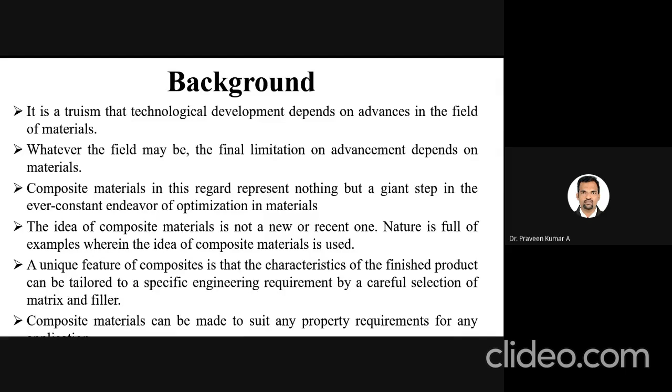Scientists in every country have different materials available. For example, Malaysia has a lot of rubber plantations, so researchers there study how to use rubber in composite materials. If you take South Africa and other African countries, grasses, plants, and hemp fibers are more available—plenty of fibers. So they research how to adopt those fibers into composites. Based on the country and the availability of source materials, these composites are getting developed.

Okay, so what is a composite? How can we define it? There is no general definition for composites till now, but

based on the literature and books, we can say a composite is composed of two or more materials at a microscopic scale, and it can be three, four, or five materials. We call it a composite material. They are heterogeneous at microscopic scale, but homogeneous at macroscopic scale.

So when we look from our eyes, it will look like a single material, but if you look at the same material through a microscope, it will be heterogeneous, meaning we can see how many materials are mixed. But when you see it with your eyes, sometimes it is not visible, sometimes it will be visible. So this is the point they are saying.

So what they are saying is, when you see through a microscope, we can see what materials are present inside the composite. But when you look, for example, at a metal matrix composite, it is impossible to find what materials they have added just by looking, but in a microscope we can see.

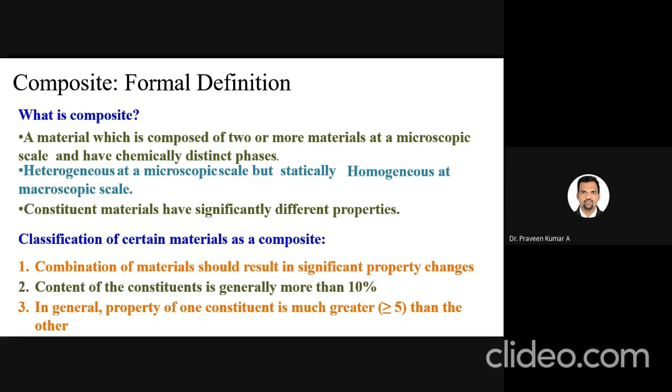But till now there is no proper definition for composite. They say a composite material can be combined with two or more materials that have quite different properties, and the different materials work together to give the composite unique properties. Different material means that material should have different properties, not the same property.

Also, in a composite, if you see it in the microscope, we can easily see the materials which are present there. So what they are saying is they do not dissolve or blend into each other.

For example, if you add sugar or salt in water and mix it, you cannot find the sugar or salt, even in the microscope we cannot see that solution. But in the composite, whatever you mix to make a composite, the two materials will not mix together in the microscope. So we can see them through the microscope, but in an alloy or solution we cannot see them.

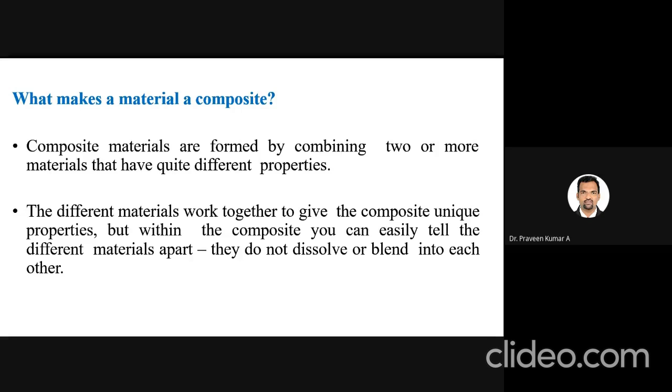Everything about this composite you have to imagine practically. Compare: when you add salt to water and mix it, you cannot find the salt again, even through a microscope, because it gets dissolved. But in the case of a composite, the materials we add never get dissolved, they will be visible through the microscope. That's just comparing it with an alloy.

So why do we need composite materials? There are a lot of materials and metals available already. The simple answer is enhanced, meaning improved, desired properties — what we want. If you want high performance, steel means you cannot even change the property of steel, and if it's aluminum, you cannot change the property of aluminum either. That remains the same. But with composites, we can change it.

For example, with aluminum, if you want to add some property, say wear resistance, what they will do is mix silicon carbide with the aluminum. If you want to use aluminum in high temperature applications, they will mix zirconia with it so that it can resist the temperature. Like this, we can add another material with the metal so that the property can be improved.

So like this we can improve the strength, stiffness, toughness, corrosion resistance, wear resistance, and even reduce the weight. Also fatigue life, thermal insulation, thermal conductivity, acoustic insulation, energy dissipation, attractiveness and cost. These are the main points for why we go for composite materials.

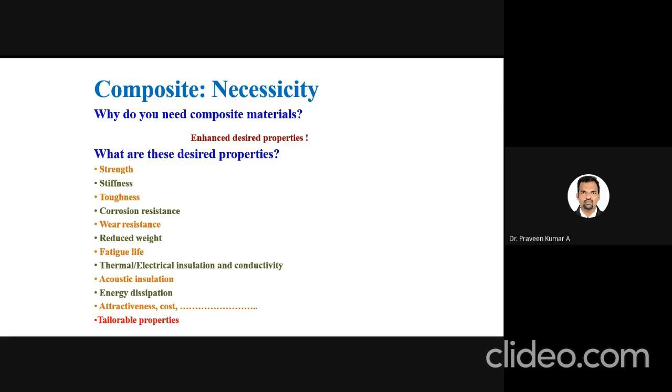Anyone know which material they are using for the wings? Nowadays they are using composites, but earlier they used duralumin. So entire most of the material for this aeroplane is made of duralumin, one type of an alloy. So we cannot use a single material for aeroplane. Earlier they tried with one material, they tried different types of failures they got. After that only they found one material which satisfies all the properties. So this is one simple example for application.

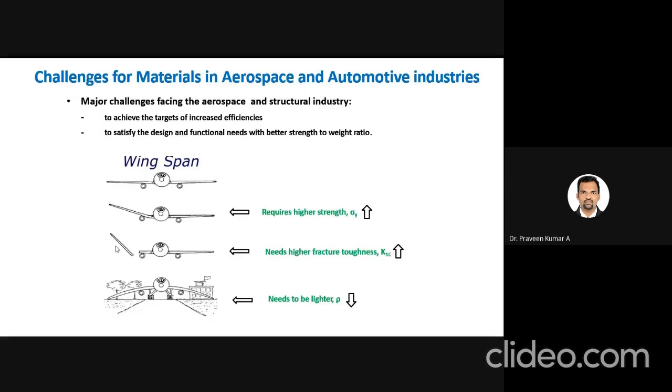Earlier also they used white petrol, today also they are using white petrol, so the fuel doesn't get changed even till now. But based on the material, they one by one reduced it. Earlier they started with 20% reduction, 30 percentage reduction, like that now they are using 80 percentage composite and 20 percentage metal alloys. So the complete weight got reduced and fuel consumption got reduced, so ultimately the cost got reduced.

Our ultimate aim is to reduce the weight of the vehicle. If you reduce the weight of the vehicle, the fuel consumption will be less and you will get more mileage. That's why if you compare today's car with the olden days ambassador, the ambassador will have more weight, it is made of steel material, so it will not give mileage. We cannot go over speed also, it will go at an average speed, and the mileage also it will give less.

But today, if you take any of the cars, completely it is made up of composites, so our mileage also gets increased. The cost of the car also got reduced somewhat, not more, somewhat the cost also reduced. But the only thing is the earlier materials will not absorb the impact energy and transfer it to the passenger, so the car will not get damaged, the passenger will get damaged. But nowadays the car will get damaged, the passenger will escape with minor injuries. Your life will be saved.

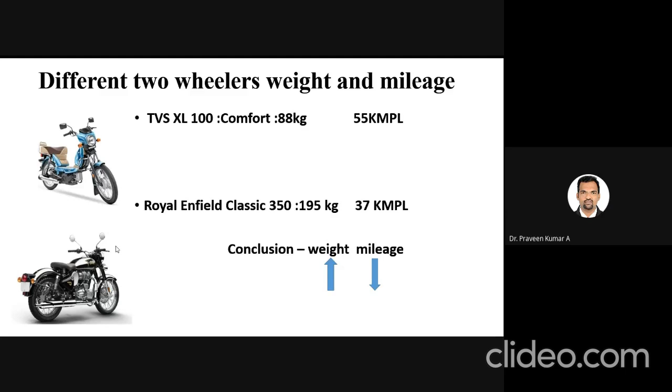So this is the revolution which has happened, used to save the life. What they are saying is they are reducing the weight, at the same time it will reduce the fuel consumption, and automatically when fuel usage gets reduced, environment pollution also gets reduced. That's why most of the European regulations have made a strong point that it should be made up of composite materials instead of metal alloys.

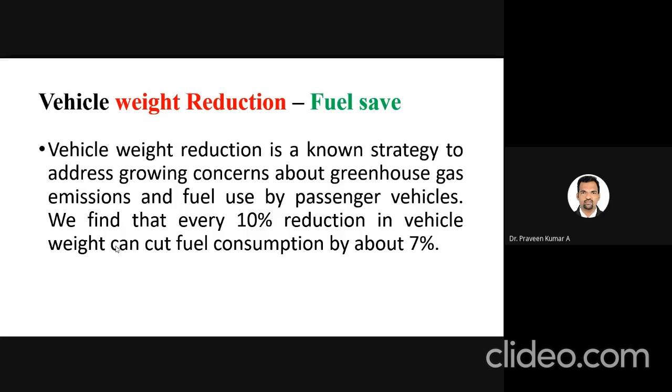So what they're saying is if you reduce weight by 10 percentage, your fuel consumption will reduce about 7 percentage. So when the vehicle weight is reduced, we can save more fuel.

So why do we want to make new material? First condition is to reduce the weight and increase the fuel economy, meaning reduce the fuel amount. Automatically it will reduce the pollution. But at the same time, whatever mechanical properties the metal alloys give, our composite also gives. So without compromising the mechanical properties, only weight should be reduced, but the property we should get the same. So like that we have to design a new material.

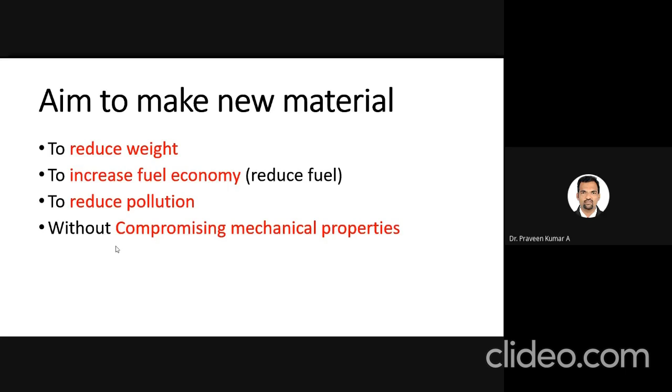Imagine now they have reduced about 200 kgs to 300 kgs. So then how much fuel can they save nowadays? That's why composite materials play a major role in any application. First it will reduce the weight, next it will give improved properties, and so many other things. They have given us a statistical report which shows these improved properties.

Earlier they used composite material that was not fire resistant, so 15,000 people lost their lives because the material used was not fire resistant. Nowadays everything has improved, so whatever material they use now is fire resistant. Earlier they used metal matrix composites, now they are using polymer matrix composites to increase the fire resistance property.

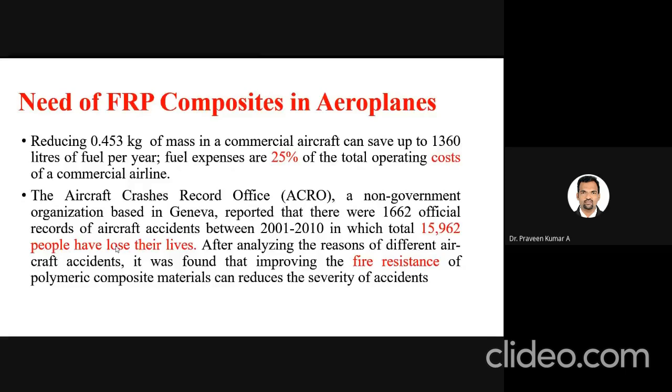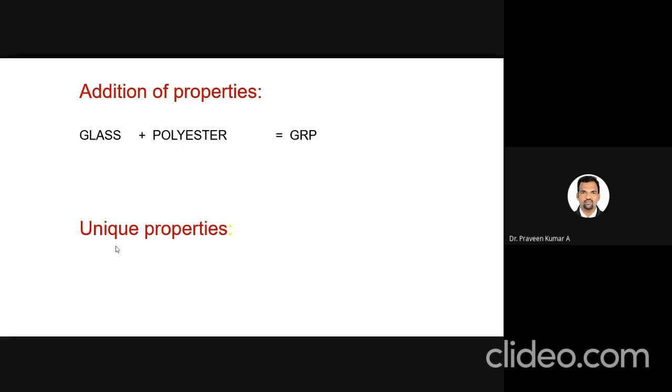So what do we get if we make a composite? First, addition of properties. If glass is A and polyester is B, adding glass and polyester gives you material C, which is glass fiber reinforced polymer. Glass has high strength, polyester has chemical resistance, so together you get a high strength, chemical resistant material. Earlier, glass alone had strength but no chemical resistance. Polyester alone had chemical resistance but not high strength.

So when you mix the two, you get GRP. The best example of a composite is concrete. When you use only sand, nothing. When you use only gravel, nothing. When you use only cement, nothing. When you use only steel bars, nothing. But when you mix all of these, you get a strong pillar.

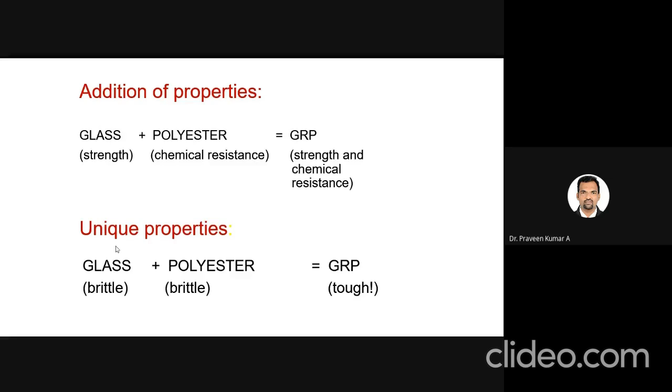So each material has different properties. When you add them together, you get the combined property — that's what we call a composite. We cannot call glass alone a composite, we cannot call polyester alone a composite, but together when mixed we call it GRP, a composite material. Also, unique properties emerge: glass is a brittle material and polyester is a brittle material, so when combined you get a tough material. The mechanical properties also change.

Now look at this temperature chart. On the y-axis they have given temperature: 200, 400, 600, 800 up to 2000 degrees Celsius, comparing different composites. Earlier they used polymer composites, which could withstand around 400 degrees Celsius. Then they tried metal matrix composites, which withstood around 1100 degrees Celsius. Then ceramic matrix composites, which withstood around 1400 degrees Celsius. Then carbon or graphite composites, which withstood about 2000 degrees Celsius. So the evolution has happened year by year, as people compared different materials with all the older materials.

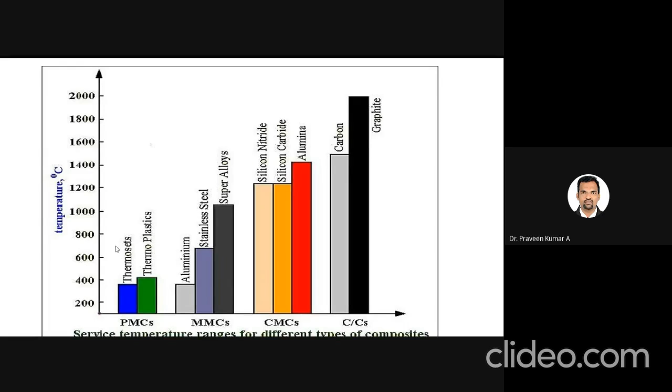At last, carbon fiber composite is the material used for space applications. Where you have high temperatures, if you want to withstand 2000 degrees Celsius, you can use carbon composites. For example, in power plants where a person wants to resist fire, they will use cloth made up of carbon fiber so that fire will not affect them. So wherever you want to withstand temperature, you will use this composite material.

What are the special features of this composite material? The first one is good specific strength. When you compare strength in terms of weight, we call it specific strength, or strength to weight ratio. These composite materials have 40 to 60 percent more strength to weight ratio than aluminium. Among all metals, aluminium has the highest specific strength, but composites have 40 to 60 percent more than aluminium, and also corrosion resistance.

Corrosion resistance means, for example, you are using a vessel prone to acids. What will happen after 5 to 6 times of usage? It will get rust, corrosion will happen. These composite materials will never get corroded, no matter how many times you use them or whatever chemical you use. But if you use metal or alloy, corrosion will definitely be there. In composite, you never get corrosion.

The specific strength is more, and durability. When metal and alloy get corroded, their life easily erodes. But in composite, there is no erosion, so durability is more, and the life of the material will be longer. That's why they are replacing metals with composites.

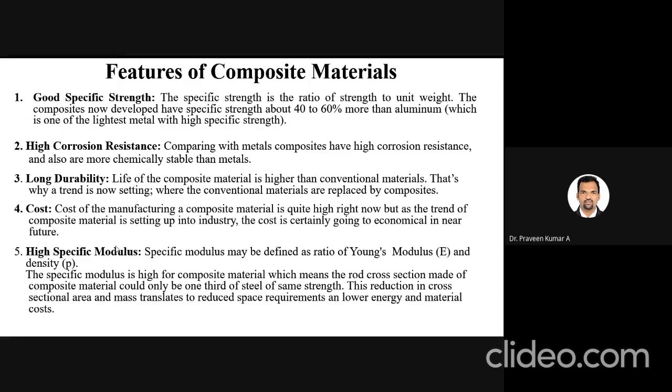The other point is high specific modulus, which means the ratio of Young's modulus to density. This is also very high for composite material, meaning we can use less cross-section area and mass compared to metals. This is the fifth property of composite material. These are some of the properties compared with their use.

Earlier they used steel more in every place, because the cost is very low. Next they used aluminium, so steel and aluminium are the most common metals in any product. But nowadays all these parts are made completely of composites. Take the example of a washing machine: earlier the complete component was made with lightweight metal alloys, but nowadays if you touch it, it's composite material. Even from the sound itself we can tell. Similarly, earlier they used steel chairs in all homes, but nowadays they are using polymer composite chairs.

The main reason is weight. When you compare steel and aluminium with composite, composite has much less weight than aluminium. And thermal expansion: when you heat a material, it should not expand, because if it expands, the strength will get reduced. For example, if you heat steel or aluminium, any metal, it will get bent due to expansion from heat. But composite will never get thermal expansion, not even 1%. So thermal expansion is very low for composite.

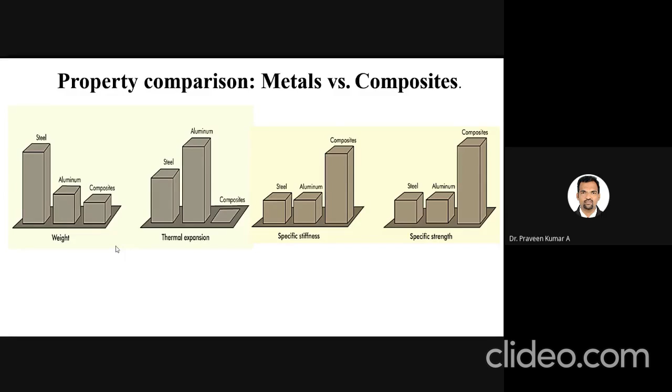But composite will not get that much deformation. And strength also, it is more when you compare with the metals. Okay, so the composite will have more strength. These are the four main properties in which the designers and engineers have chosen composites and replaced all the metals and alloys.

Okay, so in that, as I have said, simply only one term I am using, nano composites. Composites is a material which they have used for more than 100 years, but nowadays, recent 2020, from 2010 to 2020, everyone is working on nano composites. So this is simply one example I am giving, means the effect of nano composites, how to use the material effectively.

A simple practical example you can keep in mind to remember this nano composite is buttermilk. If you take a tumbler of buttermilk, 100 ml, imagine you are putting one whole green chili in that, mixing it directly. If you drink it, 95% of the time you never get the taste of the chili. You will get the taste of the buttermilk, but you won't get the taste of the chili.

And imagine that is macro level. Micro level means you are cutting the same chili into 10 pieces, mixing with the buttermilk, and you drink. Now 60% we can able to bear the chili smell. Same chili you grind in the mixie into powder, and add in the buttermilk. Now if you drink, 100% of the chili property you will get.

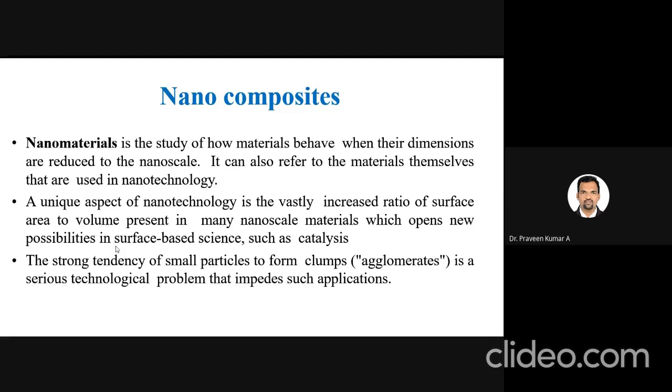Even when water falls on the raincoat, it will not stick on it. It will easily drop from that. So like that, nano material they are applying in all the areas now. So when you add any nanomaterial in the composite, that is called nano composite.

And another thing which they are using recently is biocomposite. Biocomposite means we are using any biomaterial. Biomaterial means which will withstand blood, which will withstand the human bone - everything which is kept inside the body, then we can call it a biomaterial. These biomaterials can be added to any composites, then we can call it biocomposites.

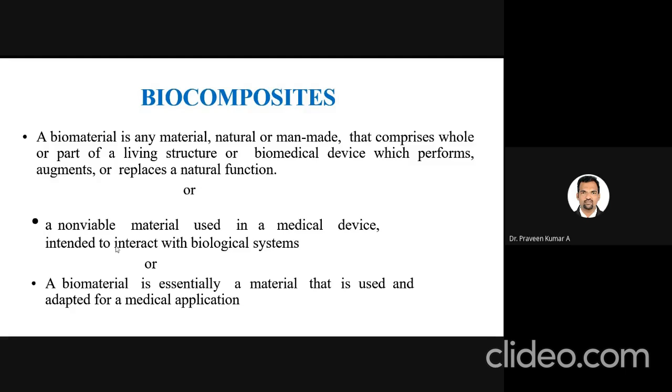So where are they using biocomposites? For joint replacements - when two joints in a human body get damaged, to join that they are using biomaterials, bone plates. Earlier we can see in movies also, because when bone got fractured, they might have kept steel plates inside. After that, they kept titanium plates. Titanium is a metal, so after 5 years, when your bone gets joined, it will get itching.

So it cannot withstand our blood circulation, and it will give more pain to you. So what will they do? Immediately they will make a surgery, and they will remove the joint. Nowadays it is not at all required to do a second surgery, so we can use biocomposites in that.

What will it do after five years? Its lifetime will be 5 years. So when the bone got joined, after 5 years it will get degradable, so inside the blood circulation, it will not get into it.

Earlier, they will make stitches, and after they will say after 10 days come, we have to remove the stitches. But nowadays they are using biomaterial for the thread. So that thread, after 10 days, it will get decomposed, so no need to do another time removal. So like this, dental implants.

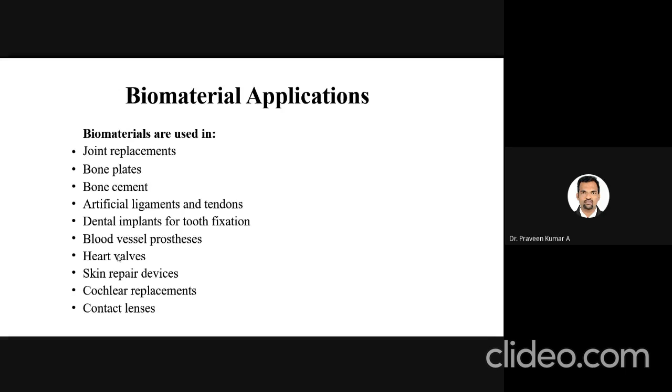So 3D printing is a development in manufacturing, but we have to look for different materials. That's why we are going for biomaterials. So this is also one of the advanced composite, biocomposite materials.

So like this, the ages, the evolution of materials, as humans developed, this material also got developed. Starting from gold, copper, bronze, iron, then cast iron, steels, then alloy steels, then super alloys, then titanium alloys. So they kept on developing.

So like that, composites also developed from 10,000 BC. Natural fiber composites, then man-made composites, then hybrid composites, then nano composites. As the years passed, these composites also got developed. So from 10,000 BC, the composite started its growth till 2020, and it is still growing.

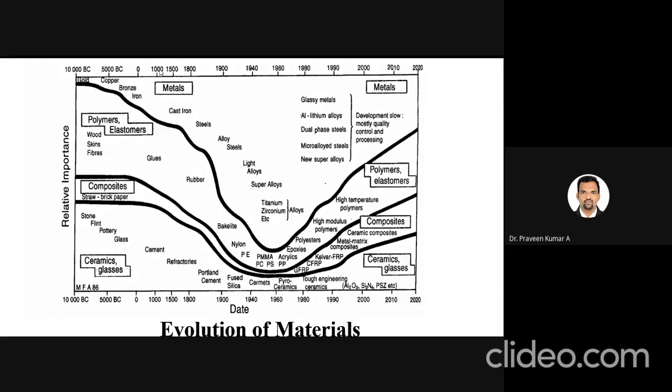So I'm not going to discuss this deeply. Next, as we said, the composites which have evolved - what did they do? Earlier days, to create a weapon, first in 4000 BC they used writing material.

So in movies we might have noticed, they will insert that one bird feather in one liquid, then they will write. That liquid is made up of papyrus plant. So in 4000 BC itself they have used papyrus plant mixing with these two things as their writing material.

Then later, 1300 BC they used straw bricks. Straw bricks means they used grass with the clay, combined both and they used.

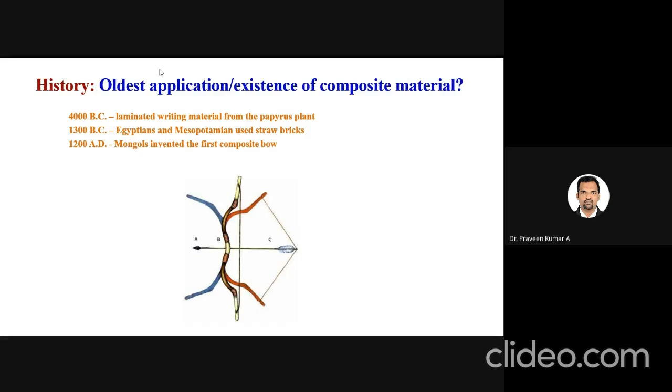Then later, 1200 AD the Mongols used the composite bow. So we will see how they are making this composite bow, and what materials they used. They have used wood, horns, leathers, bamboo, and deer horn.

This horn and antler they are using because they are naturally flexible and resilient, so the bow should be flexible. So they use this horn and antler, and they use the sinews.

This part they made using sinews, that is made up of cows and deer tendons and glue. And bladder of fish - they will cut the fish and take the bladder for sticking. To stick the two wood, today we are using Fevicol, but earlier they used bladder of fish as a glue, and strings in the bow strings will be there.

So they used horse hair, otherwise they used silk. So these are the materials they use.

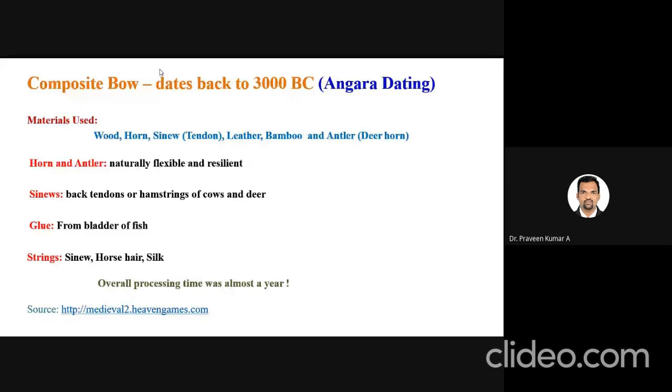So to make a bow it will take 1 year, to make a complete bow, so that much time it will take to set, because everything should be strong. If it is wet, it will break again. So to make a strong bow it took 1 year for them, when it was 3000 BC.

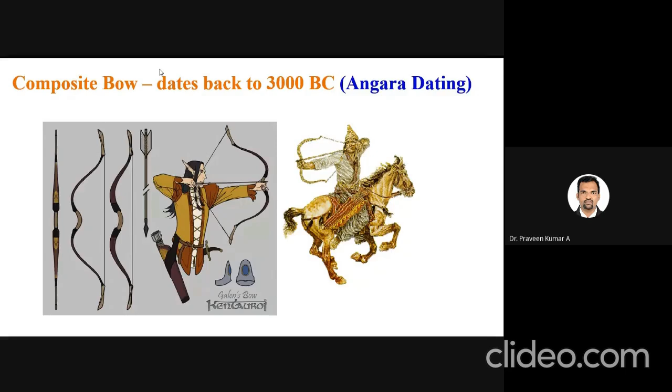This bow, different kinds of bow they developed using natural materials. They combined 2 to 3 materials. They developed composites in 3000 BC.

Some examples are straw bricks, concrete, and wood. If you say our tree is there, if you cut the tree, there will be cellulose and lignin. So this is the best example for a natural composite.

Our human body also - muscle and bones are made of different materials. Muscle is one type of material and bones are of different types of materials. So this is also one type of composite.

Then tires - if you see a tire, if you burn the tire, you can see steel fibers inside the rubber tire. So tire is also one example of composite.

Then plywood - from 2 to 3 wood materials only they are making plywoods. Then sports materials also they are using.

If you take a cricket bat, that bat will be of one material and the handle will be of a different material. Both use some gluing agent to make the bat. If you take a shuttle bat, the net is made up of different material, and the outer covering is made up of different material. Most sports goods are made up of different materials. If you take a football, outside one material cloth will be there, but inside rubber will be there - a rubber ball, and there you are blowing air. So like that, composite is employed everywhere in all products.

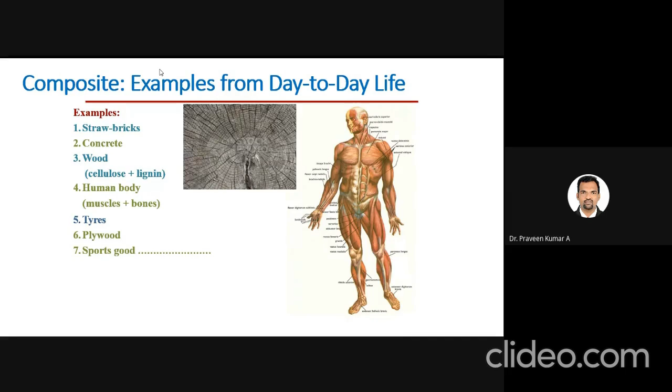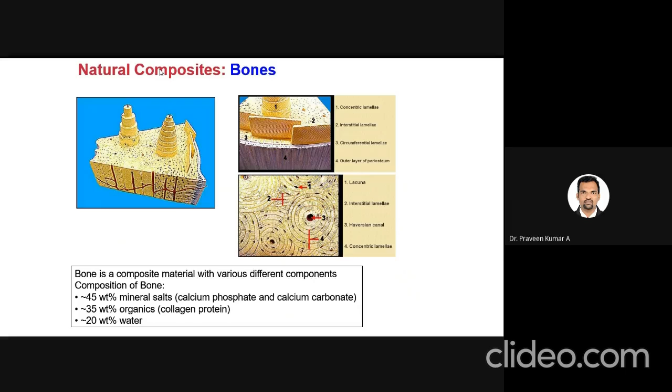This is the best natural example for composites - wood and bone. These both will have mineral salts, collagen, water, like that. Different types of materials are added in bone and wood. This is a wood - wood is also a best example for composite, which will have cellulose and lignin.

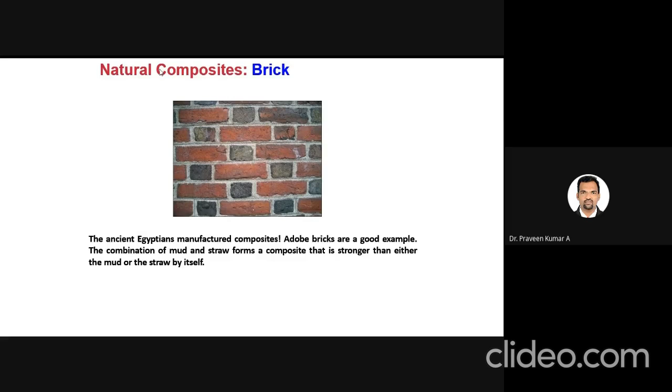And brick - see the brick's color itself, one is red, one is black, and in between they use the cement. So these bricks also use two to three different components. If you go and visit manufacturing sites, you can see they never use only clay - they add some other components to get some strength, and then only they will burn it. Then only we can get the brick. So this is also one best example for composites.

And you might have seen sea shells. Sea shells are also a good example for natural composites, in which calcium carbonate will be more. From these shells we can make teeth, so for dental applications we can use it, since it is much stronger.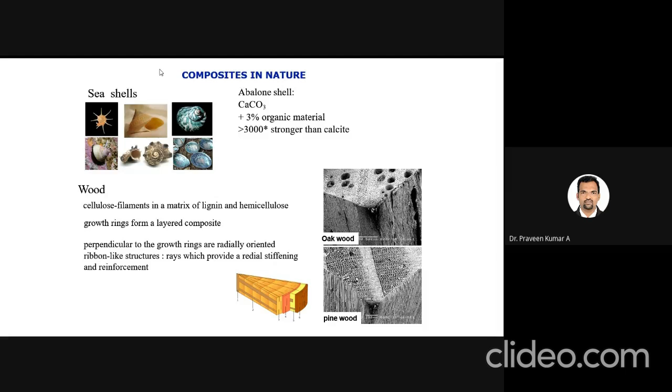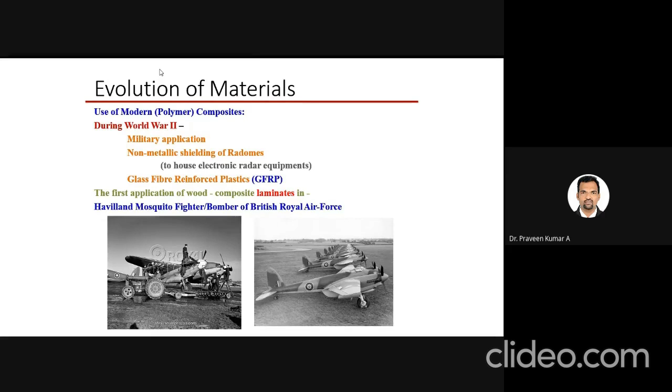These shells are all available naturally as a composite material, which is not made by man. Everything available naturally will have a combination of 2 or 3 materials. Later, man-made composites were developed during World War II. For military and radar applications, they used means to reduce the weight, using man-made polymer composites during World War II.

So now we can see, if you combine matrix and reinforcement, you will get a composite. This is just a schematic diagram. The matrix will be continuous - if you imagine, it will be like a gum or glue. That gum is the matrix.

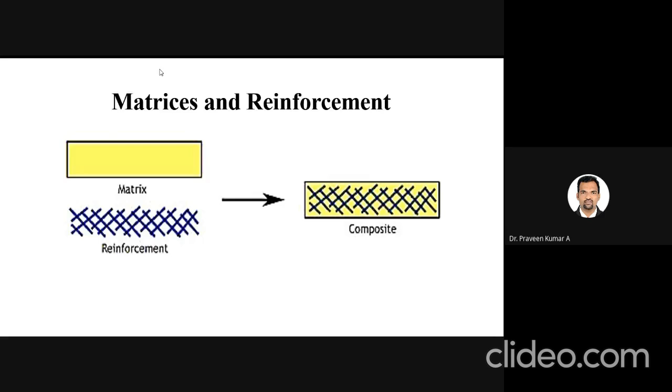The reinforcement will be like our jute fibers. We can use mats, house-made mats, like we use in the house. So when you combine both, you will get a composite plate. This is a composite.

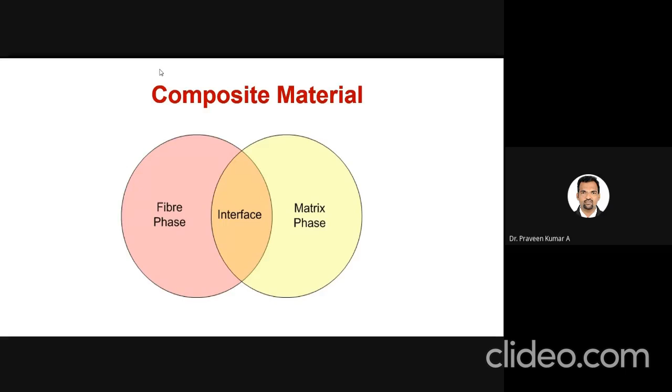When you combine this matrix and the fiber, at that interface, does it get mixed? No, it will not mix together like that - it will form a bonding, a new bonding. That bonding only makes the material very strong.

The constituents of composite are matrix and reinforcement. Here we can see the light color - that is matrix, and the center dark color is fiber. In between, the hatched parts are the interface which is formed. So clearly they have shown this.

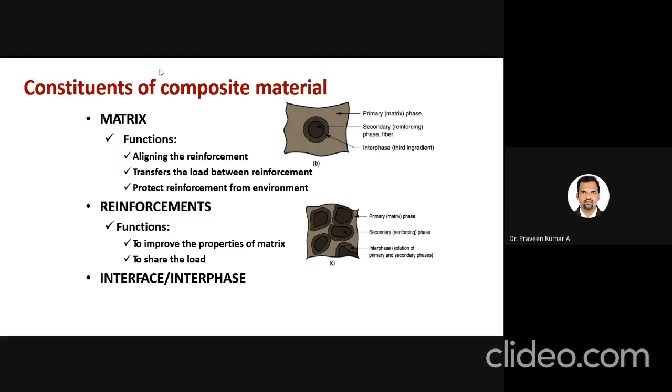So like this only the composite will develop. Even if you mix 2 or 3 materials, it will not completely dissolve in that matrix. This is a microscopic view - if you see under a microscope, this composite will look like this only. We can able to see a matrix, we can able to see a reinforcement, and also we can able to see an interface, that is the boundary. So three things we can able to see.

Example for composite: the mixing of lignin and cellulose is wood, so that is one composite. Gravel and cement is concrete, so that is composite. But we cannot say the same for hypoeutectoid steel - when you mix ferrite and pearlite, it will never be a composite. Why? Because it gets mixing, it gets dissolved, so we cannot able to see separate phases. So we cannot call this steel a composite.

Reinforced concrete - gravel plus cement and steel - is also composite. Then stainless steel - if you mix any material, the grains will get moved, so that also we cannot call a composite. Cement alone is not a composite - only when it mixes with some material and makes concrete, then we can call it composite.

Cellophane we can call a composite, because multiple polymeric layers, different polymeric layers will be there. Reinforced plastic, even though that plastic will have different material, it will not improve the property, so we cannot call it a composite.

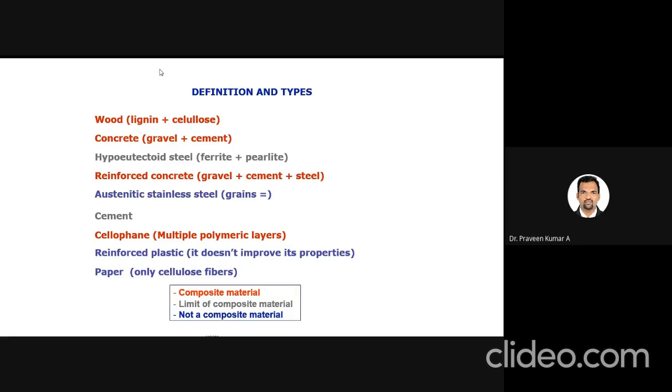In earlier days you have studied paper also - they mix more materials and make paper. Can we call it a composite? No. Why? Because only cellulose is used in the composite paper, so we cannot call it a composite. Simple examples of which is composite, which is not a composite - you can understand from this.

So based on composite, development was there. When it is a composite material, if it is applied to any part, it is called a composite structure. Composite structures are there - only composite they have used, and they used foam, that is called a sandwich.

Everyone knows about sandwich - if you take a food sandwich, top and bottom layers will be bread, and inside they will keep some stuffing and vegetables. Like this only, this composite sandwich structure we can make - outer top and bottom we use the same material, and inside we use a different material. That is sandwich structure. Then honeycomb structure - top and bottom we use plates, and inside structure will be honeycomb. That gives more reduction of weight and increased strength. So based on the different structure, we can change the composite applications also.

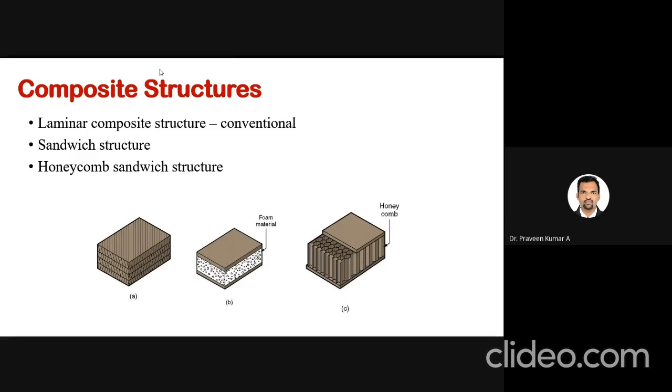So this is the main thing. There are only five materials in our universe: metal, polymer, natural materials, foams, and ceramics. If you combine any two of these, we can call it a composite. If you combine metal and polymer, that is a composite. When you combine ceramic and metal, that is also a composite. When you combine foams and glasses, or any two of these five types, it is called a composite.

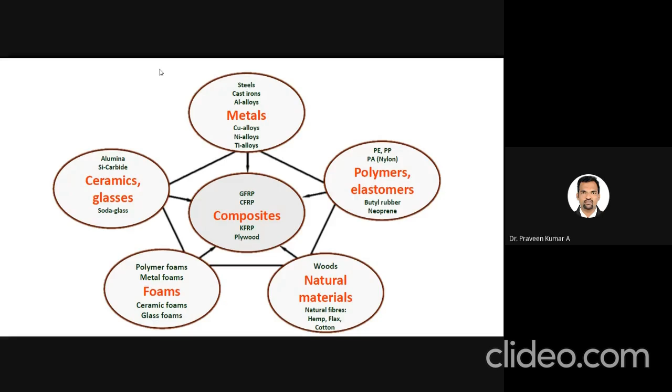So how to make a composite is the biggest challenge, because when you mix two materials, first they should get mixed properly. For example, when you mix salt with water, it dissolves. When you mix sugar with water, it dissolves. But if you mix wax with water, it never gets mixed. Composites are the same way - they never just mix naturally. So we have to see which materials bond well together.

For example, if you want to make one complicated shape, which manufacturing process can we use? 3D printing has been used for the last 20 years, but earlier we could not use composites with it. Nowadays we can use composites in 3D printing. So which manufacturing process and which material to use - we cannot combine them randomly.

For example, take biryani - there are varieties of biryani, 50 varieties. How do they make different biryanis? By changing the ingredients. If it's more spicy, it's called Hyderabadi biryani. When it's more sweet, it's called Kerala biryani. When it's average, it's called Tamil Nadu biryani. Composites are the same way.

When you mix different materials, you get different properties. Andhra people will not eat Kerala biryani because it will be sweet - they never like sweet. So whichever property you need, you add that material, and then only you get that property. So we can produce n number of combinations using these materials based on our requirements - that is the beauty of composites.

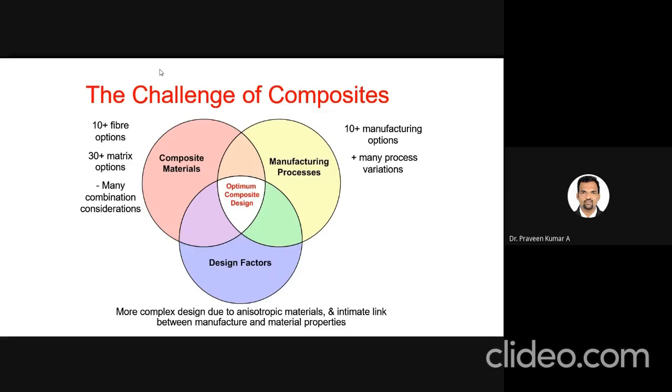Okay, so what they are doing? As we said, composite means combination of fiber and matrix. So this fiber will have high strength, high stiffness, and also less weight. Here the matrix will have good shear properties and low density.

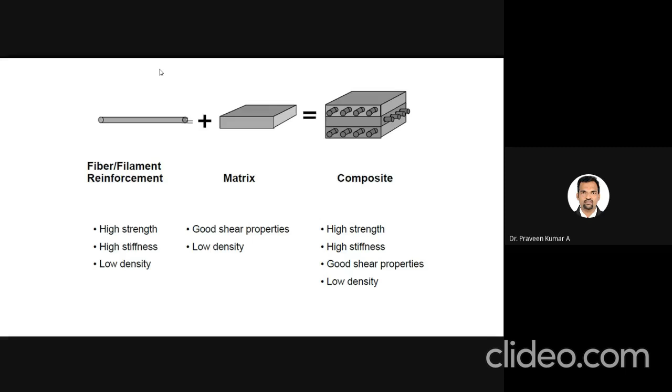So easily we can know the formula. The formula for composite is C equals A plus B. But not every time - it won't always be the same. Sometimes you'll get A plus B equals C, and also D - one new property will be formed when you mix these two materials. That's also possible, so we can get more properties in the composite, but a unique material alone will get only very few properties.

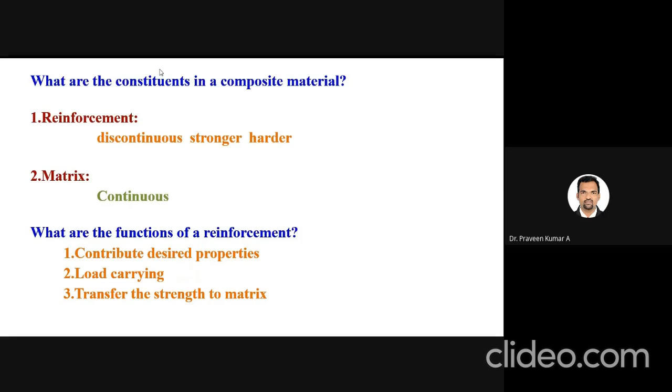So the reinforcement will be discontinuous, but the matrix will be continuous. When you mix both, you get a continuous material. So what does the reinforcement do? It contributes - the reinforcement will improve the property, and it will carry the load and transfer it to the matrix. This is the work of the reinforcement material - it improves the property, carries the load, and transfers the strength to the matrix.

And what does the matrix do - the matrix will combine the fibers, whatever fiber we are using. For example, take house mats - if you pour water on that mat, it will get wet, meaning it will absorb water. Now imagine if you fill that mat with matrix, like epoxy matrix, which is resistant to water.

The water will not be absorbed, so it will protect the fiber from the environment. Abrasion and scratches will not happen to the fiber, and it will completely and equally distribute the load within the fibers.

Yes, okay, and also it will distribute the load evenly. When you use a composite, the load should be evenly distributed - sometimes in some areas it will be more, some areas less, but it should not be like that. It should be uniformly distributed, and it should have impact resistance and better product finish. So these are the functions of a matrix.

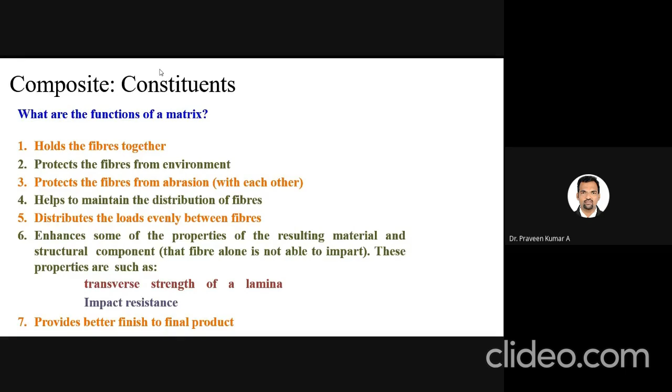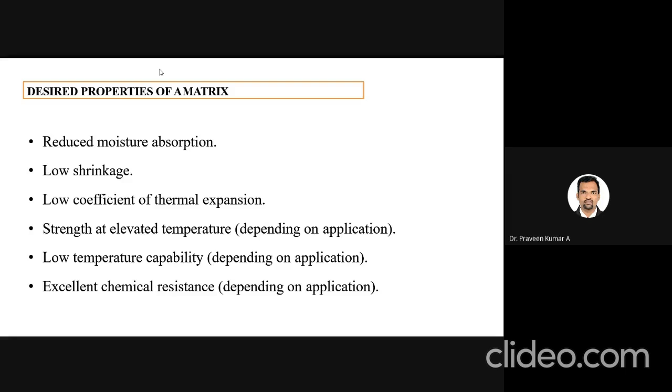And what properties should a matrix have? First, it should not absorb moisture - whether it's steam, water, or chemicals, it should not absorb it. Also low shrinkage and low coefficient of thermal expansion, so when exposed to high temperature it should remain stable, and it should have high strength, low temperature capability, and excellent chemical resistance. These are the main properties a matrix should have.

And what does this fiber do? The fiber is the reinforcement which improves the property. In a composite of matrix and fiber, typically 70 to 90% of the load will be carried by this fiber only, so while choosing the reinforcement we have to be very careful. It also provides stiffness and strength - the fiber does all of this. The matrix is simply to transfer the load and protect the fiber from the environment.

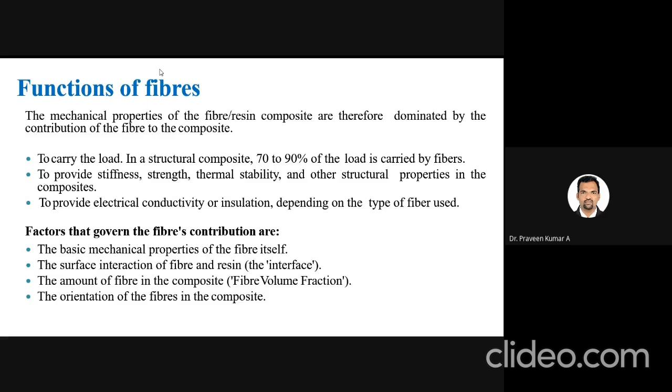And what properties should it have? It should have basic mechanical properties and interface properties, and we should consider fiber volume fraction - meaning in the composite, how much fiber should be used and how much matrix should be used, so that fraction should be considered. Also direction or orientation - horizontal, vertical, or 45-degree - plays a major role.

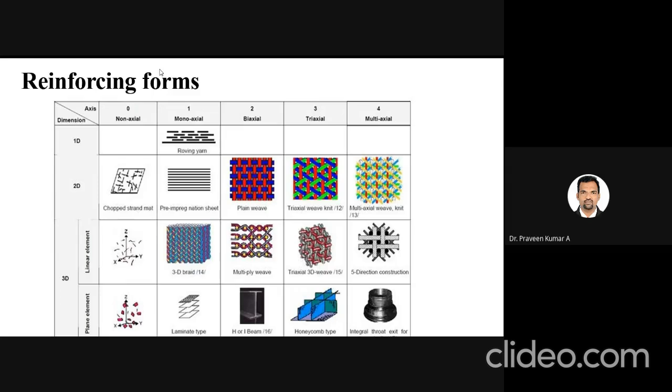These are the different types of fibers - one dimensional, two-dimensional, and nowadays they are using three-dimensional also. If you take a cloth, that is the best example of a fiber. Even with different types of weaving, if you weave in a different way, the strength will be different. So these different types of fibers exist. This is a unidirectional fiber, meaning fiber in one direction only.

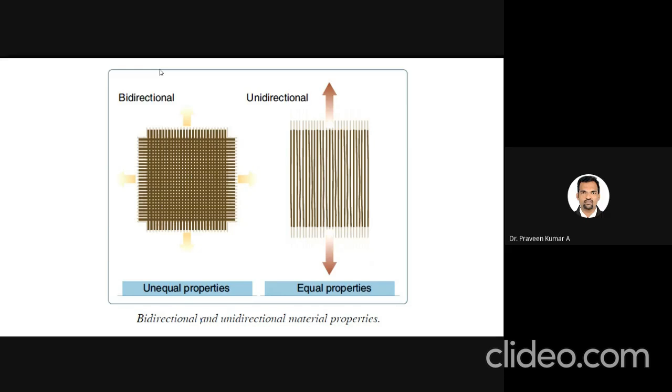In horizontal direction, thread will be there, but bidirectional fiber means two directions fiber will be there. In unidirectional fiber, only in the tensile direction the properties will be more, but in bidirectional, both sides the property will be more. For example, when pulling unidirectional fiber in the horizontal direction, strength will be very less, but in bidirectional, even if you pull vertically or horizontally, the strength will be more.

How do we classify these composite materials? This detailed classification will be explained by Mr. Nagarjuna in tomorrow's session, but just one slide now on how these composites are classified. Based on how we are making it: for example, if you take a seashell, in nature itself it is made of composites, so that is a natural composite. Example, wood - we are not doing anything, in nature itself it is made up of composites. So those are called natural composites.

When you make composites, for example by mixing two or three materials, if it is man-made, then it is man-made composite. Nowadays 90% we are using only man-made composites.

Based on reinforcement size: if the size is visible and can be touched, that is macro composite. When you see it under a microscope, that is micro composite. When you need advanced microscopes like scanning electron microscope or transmission electron microscope to see it, that is nano composite.

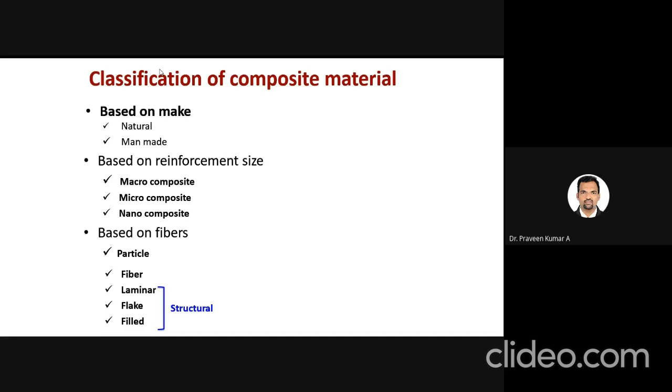Based on fibers also we can classify. There are particle reinforced composites, fiber reinforced composites, laminar composites, flake composite structures. These will be explained in detail in tomorrow's session.

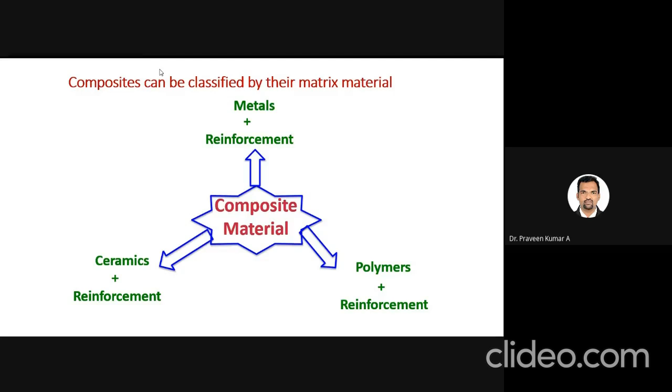And these are the composites which we use. When you compare, when you add metals with reinforcement, then it is metal matrix composite. When you use ceramic with reinforcement, that is ceramic matrix composite. When you use polymer, that is polymer matrix composite. These are the three main composites which have been used for the past 10 years, applied everywhere. So based on the matrix, there are only three classifications.

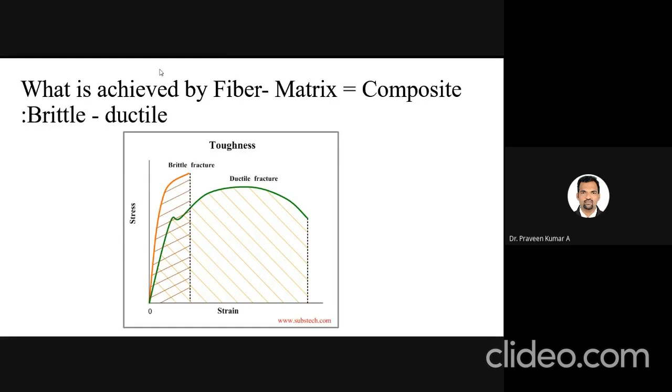But composite is a brittle material - suddenly it will break. There won't be yield stress, there won't be ultimate, directly fracture will come. That is brittle fracture. So metal will not give composite properties and composite will not give metal properties. When we combine both, we get one new property. See this brittle fracture - imagine glass, instead of a steel rod you use a glass rod and pull it, you never get a yield stress. Directly fracture will occur. So all composites are made of brittle fracture and all metals are made of ductile fracture. This is the main difference you can say between a composite and a normal metal.

What are the various advantages of composites over conventional materials? Conventional material means metals or polymers. As I said, there are five materials - foams, metals, polymers - these are all conventional materials. If you mix these conventional materials, you will get composites. So what do you get?

First thing is high strength to weight ratio, that means weight will get reduced, strength will get increased. Low density means weight reduction only. Ease of molding to complex shapes - for any material, if you want any shape, first you have to make a mold, and based on the mold you can make a product. And this is non-magnetic.

For example, you cannot use magnetic material anywhere, it easily attracts other metals, but composites never attract magnetic. And good resistance to corrosion - any chemicals you can use, nothing will happen to the composite material. Good resistance to fatigue - due to fatigue load, the best example for fatigue load is our fan.

Repeatedly load gets applied, but it never gets damaged, so good fatigue resistance. High beam stiffness means it never gets bent, strong it will be. For example, if you see wires, if a bird sits on the wire, it will get bent. But this composite will not get that much flexibility, so it will be stiff.

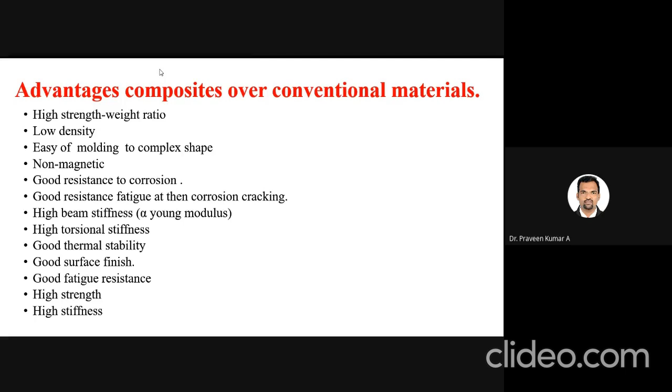These are the reasons why we want to go for composites, which cannot be given by conventional materials. And wherever advantages are there, definitely disadvantages will be there too. The disadvantage is high cost of raw materials and fabrication method.

For example, in mechanical manufacturing, the target is based on number of pieces manufactured. In all manufacturing companies, they will have a target of 1,000 pieces per hour. But to fabricate a composite, it will take more time. We cannot produce more composite products in less time. So that is a main drawback.

And cost of raw materials is too high. With metal, only one material we buy, but with composite, we need two or three materials to buy, then only we can mix. So definitely the cost will be very high.

Also, composites are brittle. With metal, it will first bend, so immediately damage will not occur - first it will bend, get damaged, then cracks will occur. But in case of composite, it will directly fracture, it's brittle.

Transverse properties means when the load is applied vertically or horizontally, the transverse properties will be very less. And the matrix will have low toughness, so that is also one of the drawbacks.

And reuse and disposal may be difficult. For example, aluminium tins we are using - after usage, what they will do is reuse them. They will melt it again and make another product.

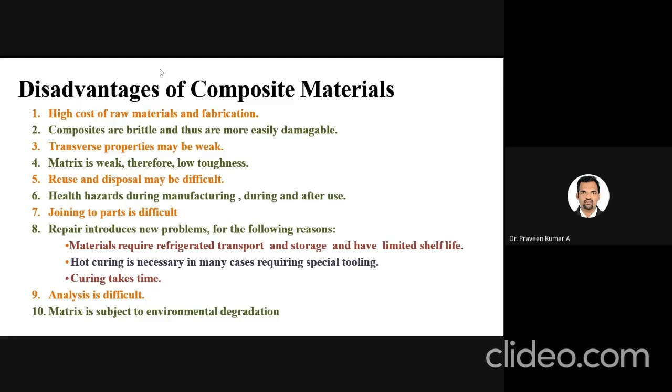What are the factors which affect the properties of composites? First, distribution: if the reinforcement is not properly distributed, it will reduce the property and you won't get the correct property. Concentration means percentage: if instead of 5%, you add 50% and make composite, you won't get the property.

Orientation: instead of vertically keeping the reinforcement, if you keep it horizontal, you won't get the property. Shape: if instead of using cylindrical, you use square, due to the sharp corners, fracture will occur easily, so you won't get the proper property.

And size: instead of 10 mm, if you use 50 mm rods, you also won't get the property. So these are the five major factors which will decide the property of a composite. Whether you manufacture a good composite or a bad composite, these five factors only are going to decide.

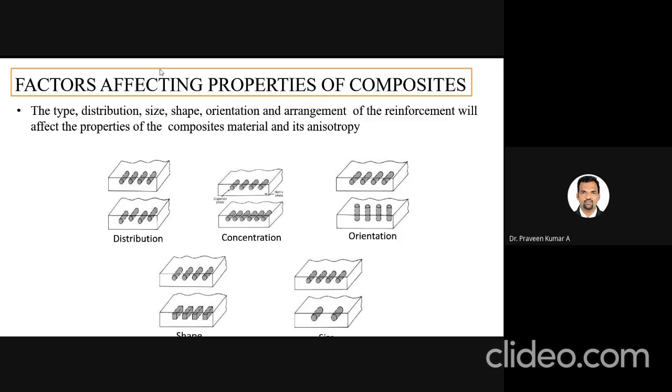So what are the fibers? This will be detailed tomorrow, but I am just giving an introduction. There are two types of fibers: one is advanced man-made fibers, another is natural fiber. These advanced man-made fibers are made by human beings.

The human beings manufacture fibers, that is advanced fiber, man-made fibers, synthetic fibers. If it is available naturally, that is natural fiber. So what are the fibers made by human beings? Best example is glass fiber.

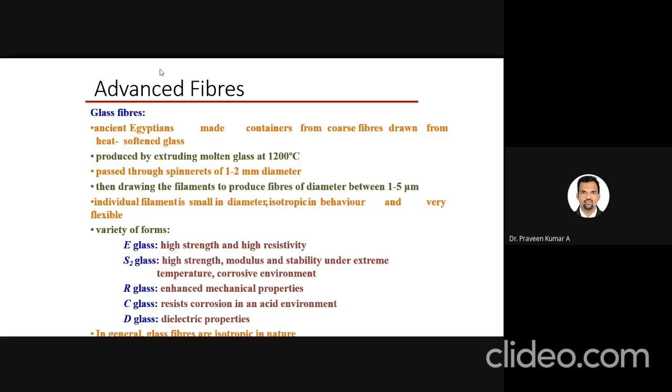Glass fibers are made using molten glass. There are different types of glass fibers: E glass fiber, S2 glass fiber, R glass fiber, C glass fiber, D glass fiber. These are the man-made fibers, and carbon fibers.

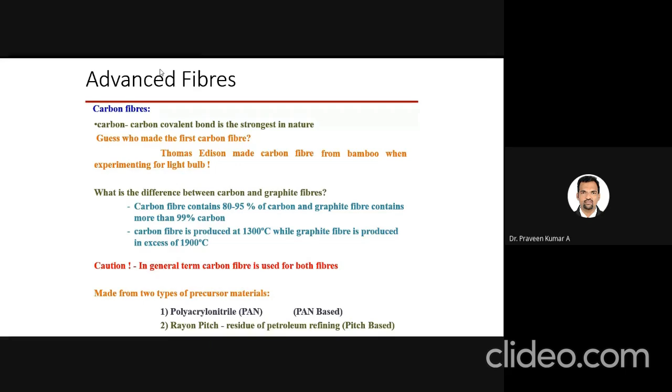Carbon fibers are also one of the advanced man-made fibers. They use carbon to manufacture this fiber. This is also one of the mostly used fibers, carbon fiber. And another one is aramid fibers, which is Kevlar fiber.

These fibers are used in bulletproof vests. The military people use a vest which is bulletproof, and that material is Kevlar. Also, race car tires are using Kevlar. This Kevlar fiber never allows the bullet through; whatever the speed may be, it will resist that bullet speed. Kevlar fiber is one of the costliest fibers, which is used in military applications.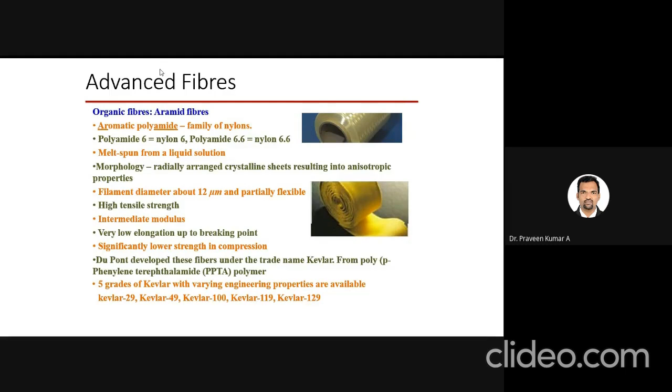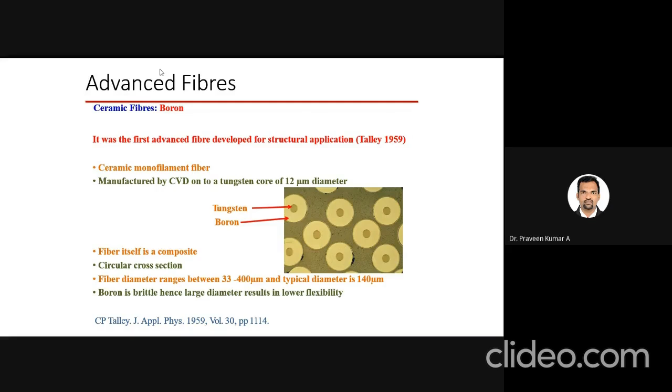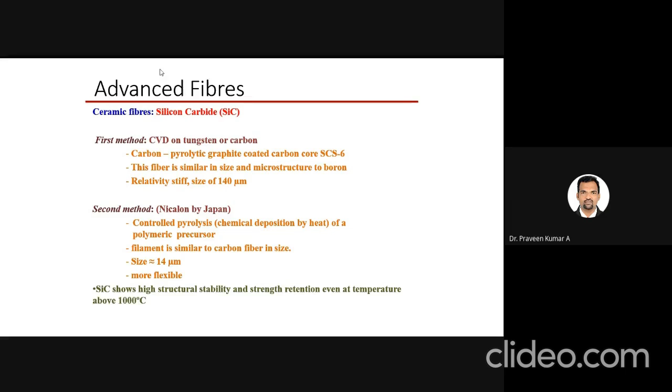And silicon carbide fiber also there, which is a rare fiber, made from silicon carbide powder. They use a chemical deposition method, the CVD process, to make silicon carbide fiber.

Next example is natural fibers. So how is silk formed? From the silkworm, they are taking silk, which is a naturally available fiber. When you take more, silk will come. That is silk fiber.

Another best example for a natural fiber is this protein fiber from spider - the spider web, that is made of fiber, spider silk. We can take that also as a fiber. And from vegetables, from cotton we can take cotton fiber. Cotton fiber is nothing but a thread - the normal thread we are using is made of cotton, so that is cotton fiber.

Not only these, from plants also we can take fiber - which is called kenaf, or jute, or hemp. So like this from plants also we can take natural fibers, and from banana tree also we can take banana fiber. So like this when we get fiber from nature, that is natural fiber.

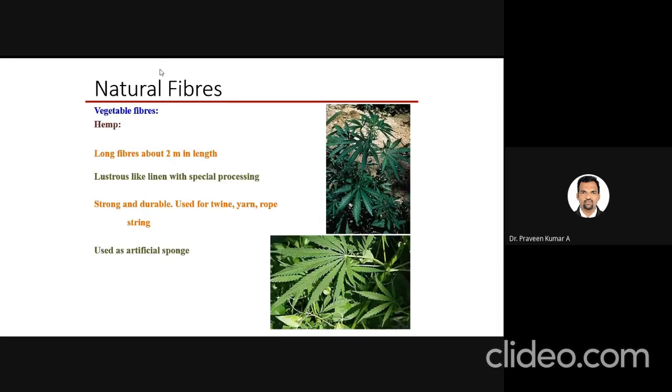This is a detailed explanation you can see in the classification of fibers, in tomorrow's session. I have given just an introduction.

The other next thing is the shape of the fiber. The shape of the fiber will also change the property. While making composite, each and every point will change your property. So you have to be very careful which material to choose, which geometry to choose, how much quantity to choose, what shape to choose. Everything you have to be very clear while choosing the material.

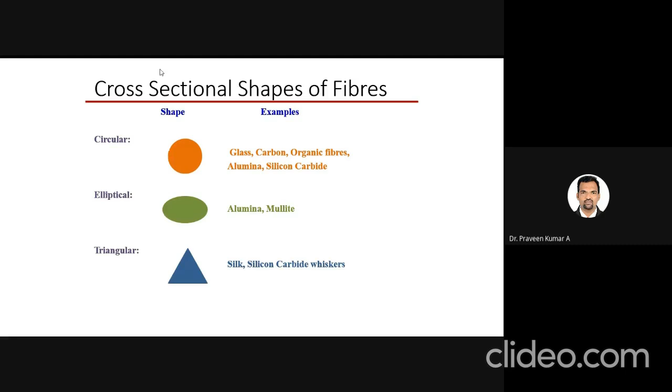It may be of circular shape, it may be elliptical, triangle - different shapes are there. The fibers are available in different shapes - hexagonal, kidney bean, and trilobal. So when you change the shape, the property will change. That is the main thing.

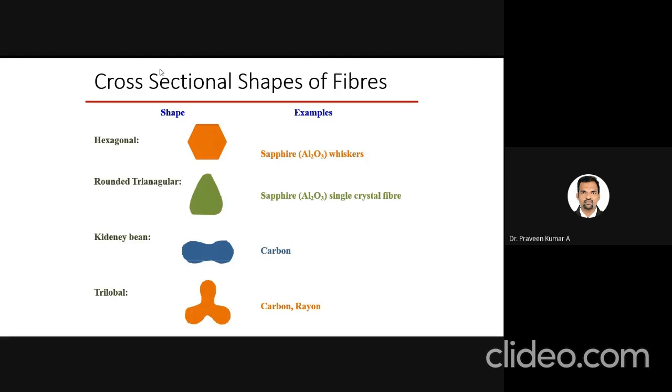These are the things we want to consider while making the composite. This application of composites will be discussed in detail by Mr. Ramesh in his session, but now I'm showing one or two slides.

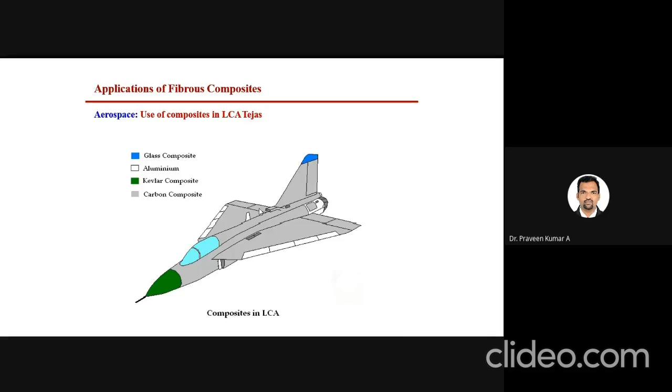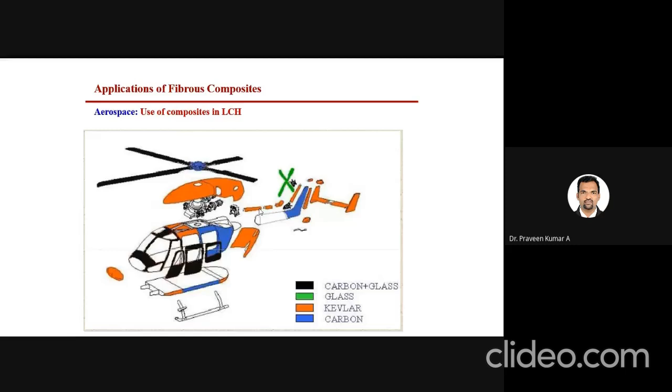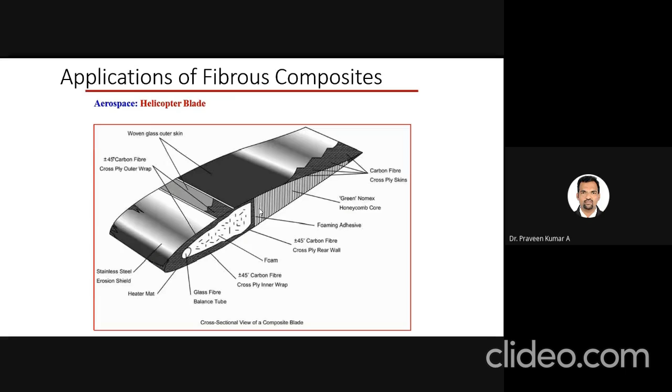This is a blade of a helicopter. And see these bat rackets, tennis rackets - the handle is made of different material, the fiber is made of different material. And lightweight vehicles - earlier days the weight of the vehicle would be more, nowadays if you take a sports vehicle, with one hand they can lift and port it to some other place.

And gloves - these gloves are used for high temperature applications so the heat will not damage your hand. For high temperature applications you can use these gloves. And this is a knee pad - knee pads also use carbon composites. And hockey bats, shoes, helmets.

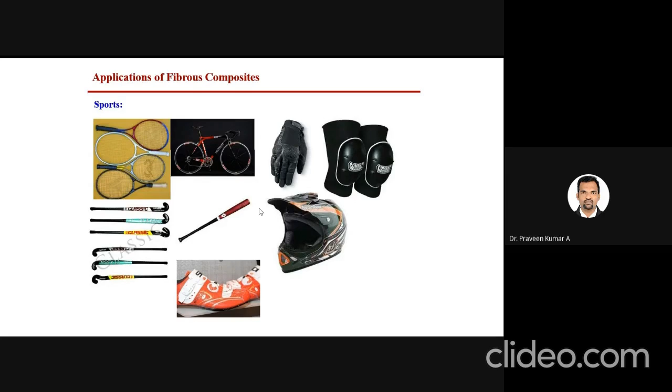When the helmet is made of metal or alloy plates, it will have more weight. Even if you get into an accident, since it is ductile it will get deformed and it will not be easy to remove from your head - they will cut it using a cutter, then only you can remove the helmet. Nowadays they are using composite helmets - immediately it will absorb the load and get damaged, it will break into two pieces, so that it is easy to remove.